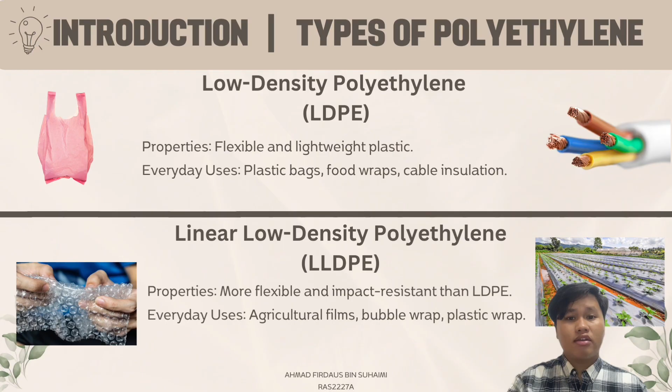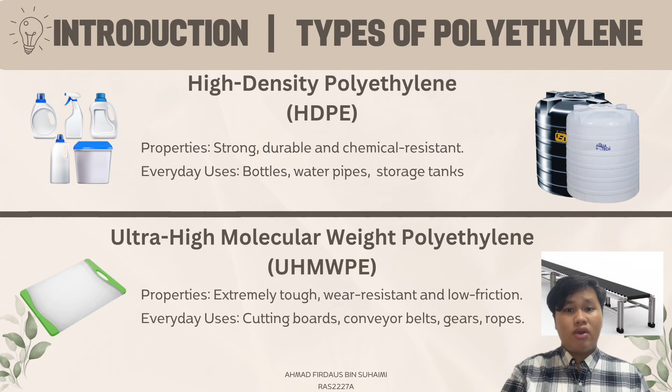Next, linear low density polyethylene, LLDPE, which is more flexible and impact resistant than LDPE. It is used for agricultural film and plastic wrap. Besides, we have high density polyethylene, HDPE, which is strong, durable and chemical resistant, for example, bottles and storage tanks. And last but not least is ultra-high molecular weight polyethylene, which is extremely tough, wear resistant and low friction. We use ultra-high molecular weight polyethylene in daily life, such as cutting boards, gears and ropes.

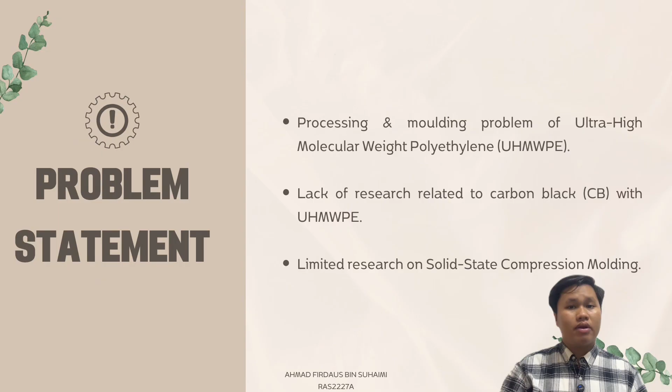In my thesis, there are three problem statements, which are the processing and molding problem of ultra-high molecular weight polyethylene, lack of research related to carbon black with ultra-high molecular weight polyethylene, and limited research on solid-state compression molding.

The objectives of my study are to prepare the carbon black with ultra-high molecular weight polyethylene composite via solid-state compression molding, to evaluate tensile properties of the composite via tensile test, and to identify the functional groups in the composite via FTIR and morphology via digital optical microscope.

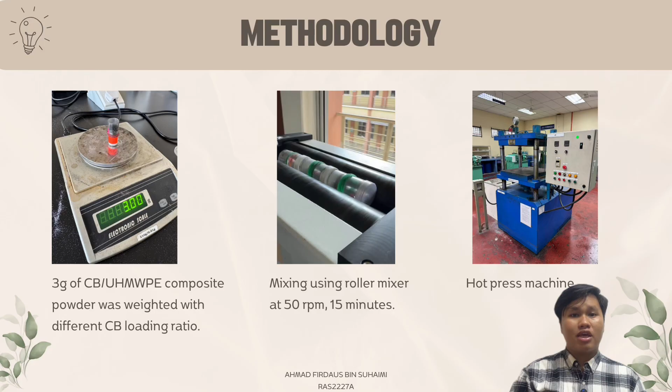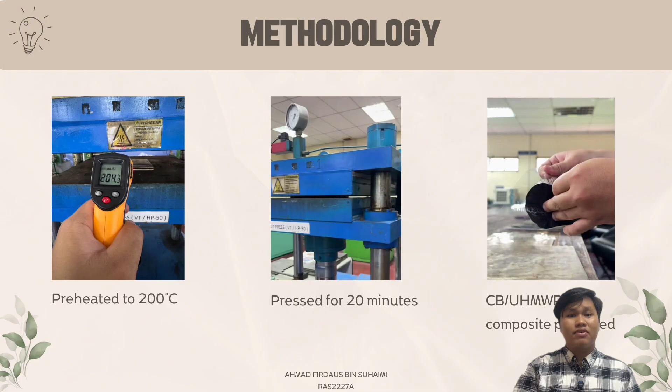Okay, now let's proceed with the methodology. First of all, 3 grams of carbon black with ultra-high molecular weight polyethylene composite powder was weighed with different carbon black loading ratios and then mixed using a roller mixer at 50 rpm for about 15 minutes. The hot press machine was preheated to 200 degrees Celsius. After that, the powder was pressed for 20 minutes under 5 MPa pressure, and lastly, the composite was produced. I did the surface morphology using a digital optical microscope, the tensile test using an Instron machine, and characterization using FTIR.

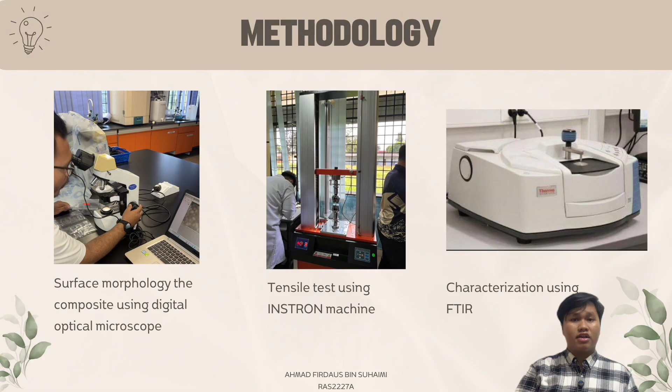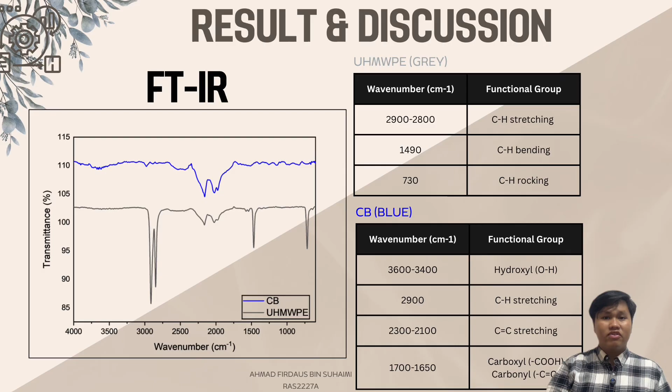Now let's proceed with the results and discussion. The blue spectrum is carbon black and the grey spectrum is ultra-high molecular weight polyethylene. For ultra-high molecular weight polyethylene, 2800 is for CH stretching, 1490 is CH bending, and 730 is for CH rocking. For carbon black, 3600 until 3400 is the hydroxyl group, 2900 is CH stretching, 2300 until 2100 is C=C stretching, and 1700 until 1650 is carboxyl and carbonyl.

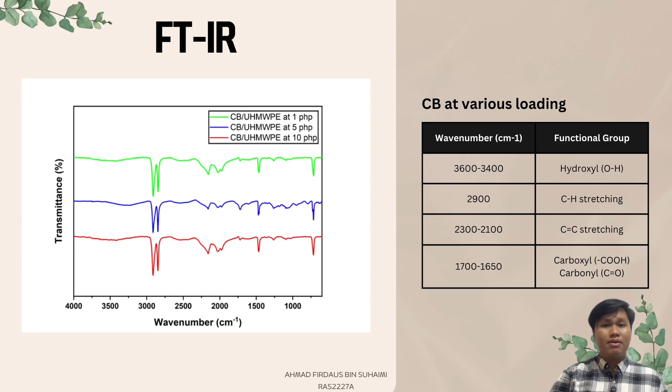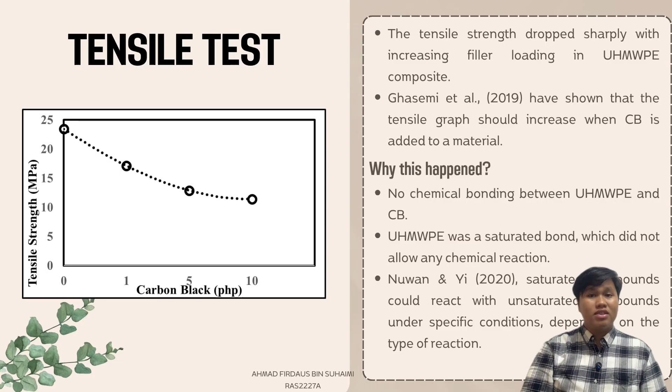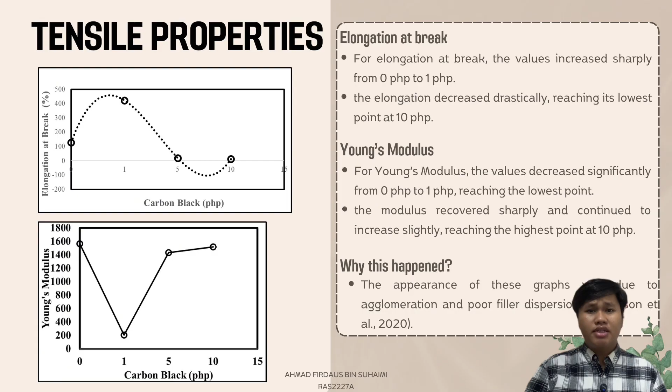Okay, for the tensile test, the tensile strength drops sharply with increasing filler loading in the ultra-high molecular weight polyethylene composite. Why did this happen? This is due to no chemical bonding between ultra-high molecular weight polyethylene and carbon black, because ultra-high molecular weight polyethylene has saturated bonds which do not allow any chemical reaction. For tensile properties, the elongation at break and the Young's modulus show the opposite trend. This is due to agglomeration and poor filler dispersion.

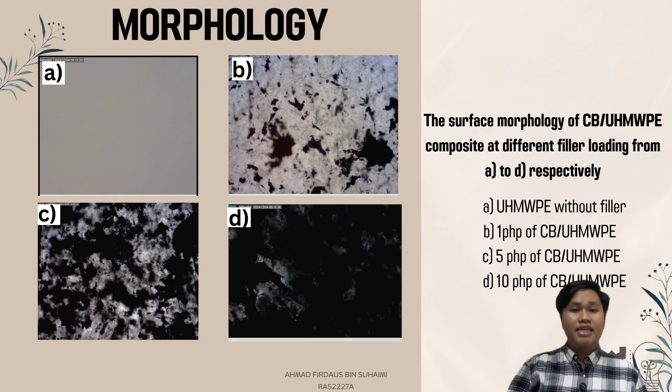Now, let's talk about the morphology. As you can see, figure A is ultra-high molecular weight polyethylene without filler, B is 1 php of carbon black with ultra-high molecular weight polyethylene, C is 5 php, and D is 10 php of carbon black with ultra-high molecular weight polyethylene.

Lastly, the conclusion. Carbon black with ultra-high molecular weight polyethylene composite was successfully prepared using solid-state compression molding. Tensile testing shows carbon black influenced the mechanical properties of the composite. FTIR analysis detected no significant new functional groups, indicating minimal chemical interaction. The digital optical microscope confirmed the dispersion of carbon black particles within the ultra-high molecular weight polyethylene matrix, and the study shows that the solid-state compression molding method is not suitable for this research.

My recommendation for my study is using an internal mixer because it provides better dispersion and can control the processing.